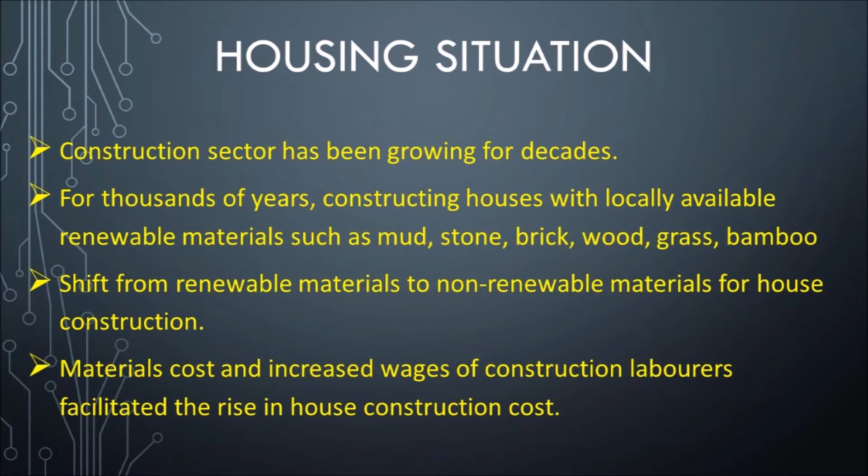Causes behind increasing house construction cost. According to the Confederation of Indian Industry (CII) and Indian Green Building Council (IGBC) estimation, every year in our country construction takes place in around 16.2 billion square feet area for housing. According to the survey, around 70% of construction cost goes to construction material cost alone. These materials include cement, iron and steel, bricks, sand, gravel, stone, murram, welding material, tiles, plumber material, electricity material, wood, etc. Particularly cement, iron and steel, and sand prices have skyrocketed. Along with this, wages of workers involved in construction like construction workers, welders, carpenters, plumbers, painters, designers, tile setting persons and electricians have increased considerably.

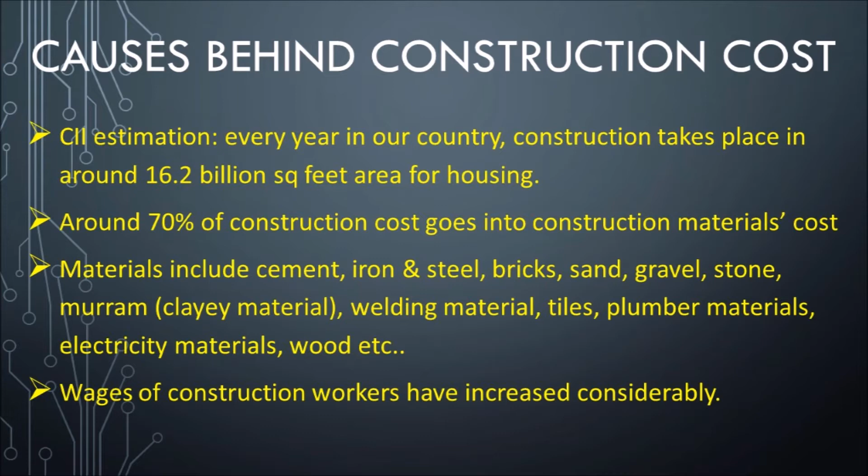House construction cost. Based on the current scenario, constructing a medium level house of 1800 square feet to 200 gajalu in a second tier city according to 2018 prices may cost between 18 lakhs to 20 lakhs excluding land price. The details are given below.

Cement 800 bags: 2 lakhs 50,000. Iron and steel: 3 lakhs. Bricks: 1,68,000. Wood: 1 lakh. Sand: 1,50,000. Gravel: 90,000. Stone: 50,000. Murram: 4,000. Welding material: 70,000. Tiles: 60,000. Plumber material: 1,50,000. Electrical material: 1 lakh. Total material cost: 14 lakhs 92,000. Construction workers' wages: 2 lakhs 50,000. Carpenter, electrician, welder, plumber charges: 1 lakh 15,000. Total: 18 lakhs 57,000.

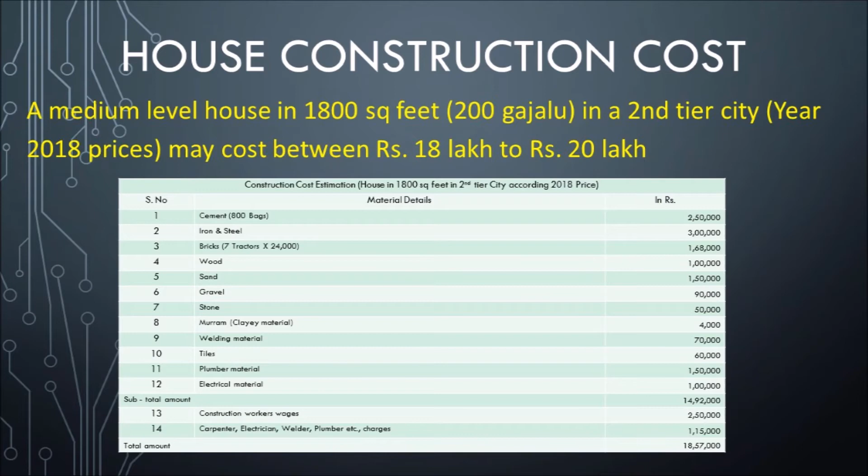What is a low cost house? The increasing cost of house construction, scarcity of raw material, unavailability of skilled persons, busy life, etc. are gradually pushing people towards low cost and environmentally friendly houses. Constructing a low cost house means constructing a house with locally sourced material along with improved skills, innovative methods and technology without compromising on the strength, performance, durability of the structure. It also includes locally available skilled persons, energy saving and environmentally friendly designs.

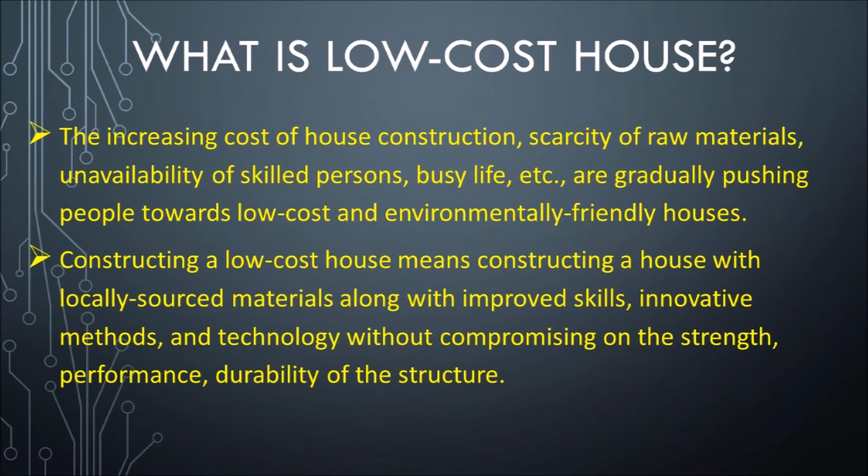Critical things in low cost house: reduction or avoidance of non-renewable and high cost materials such as cement, iron, steel, sand, etc. Reduction of person work days, technical person work days and construction time. Utilization of renewable and local materials such as mud, stone, wood, bamboo. Usage of prefabricated panels in foundation and roof, which drastically reduces construction time. Usage of locally available tiles and broken bricks for bedding.

Reduction of house management cost by designing construction to ensure natural light, airflow, etc. Usage of solar panels and water harvesting structures. Avoiding plastering works on the walls. Reducing wood by replacing with iron frames or frameless windows.

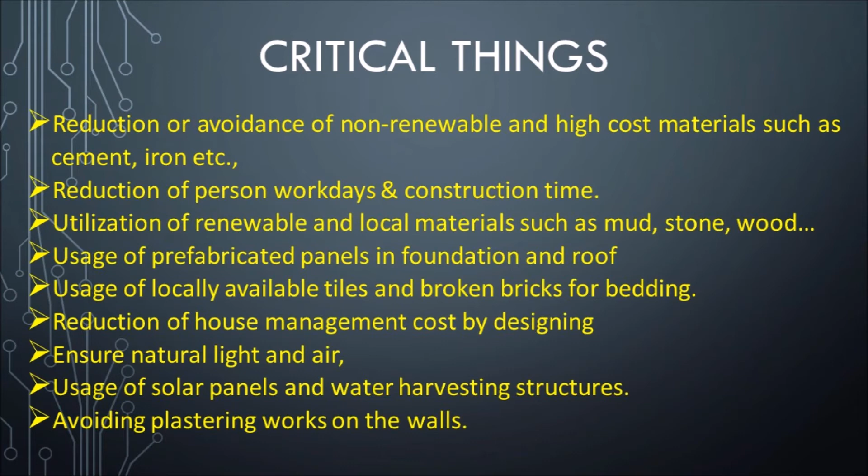Low cost houses across the country. Low cost house construction is basically based on locally available renewable materials. This is an important feature in the low cost house. This facilitates various models across the country depending on the geographical condition, environment and available raw material. There are a lot of variations in house construction in rural, urban and tribal areas. Within these areas as well we can see variation in construction. For example, in some places where bamboo, stone or mud is abundantly available, people are constructing houses with bamboo, stone and mud.

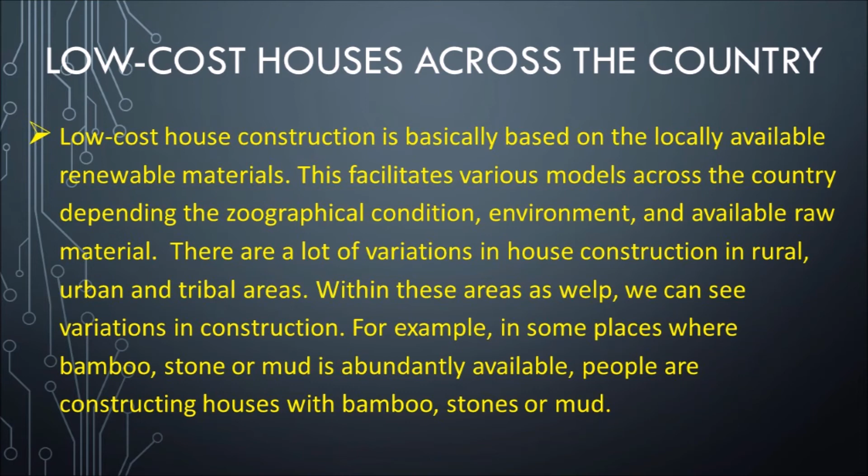Government initiatives. Low cost house construction is the need of the hour in the present context of the world, particularly in our country. According to the Indian Institute of Management Bangalore (IIMB), there is a shortage of 18 million houses as per 2015 in the country. About 99% of this shortage of houses was among poor people. Homelessness is not only a problem of lack of physical house, but it is also a problem of loss of family, community, and sense of belonging to the poor people. Providing house to all is one of the goals of the Sustainable Development Goals (SDGs).

Government of India recognized this housing problem and started providing houses to low income groups. In 2014, government launched a housing for all mission known as Pradhan Mantri Awas Yojana Urban with the aim of providing houses to the population by 2022. This mission was mainly designed on the foundation of low cost houses with advanced technology and environmental friendly design. Over the years, government has designed and implemented various policies to provide houses to the poor: Valmiki Ambedkar Awas Yojana, Jawaharlal Nehru National Urban Renewal Mission, Rajiv Awas Yojana, Pradhan Mantri Awas Yojana Urban.

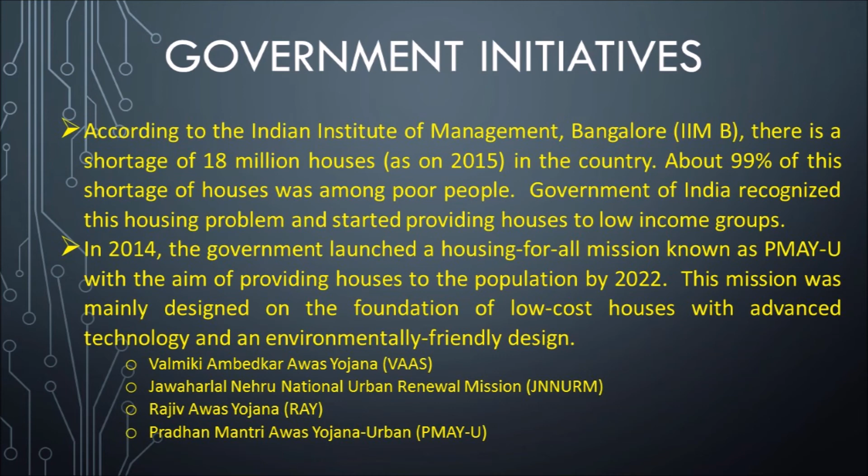Benefits of low cost house. Low cost houses are not only economically beneficial due to the reduction in house construction cost with lesser material cost and labor cost, there are various other benefits as well. Reduce house management cost. Can use locally available material. Provides employment to local technical persons. Most of the material used in the house can be reusable. Reduce house construction time. Provides sufficient light and ventilation. Can use modern technology in the construction. Environment friendly and promotes living closer to nature.

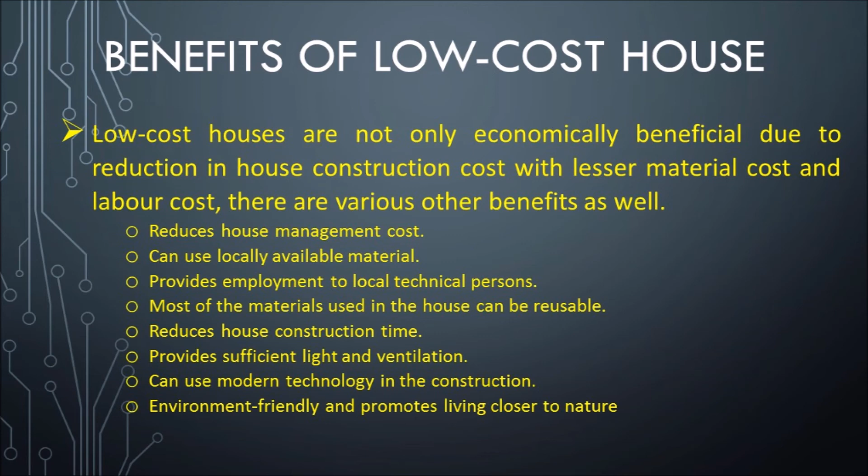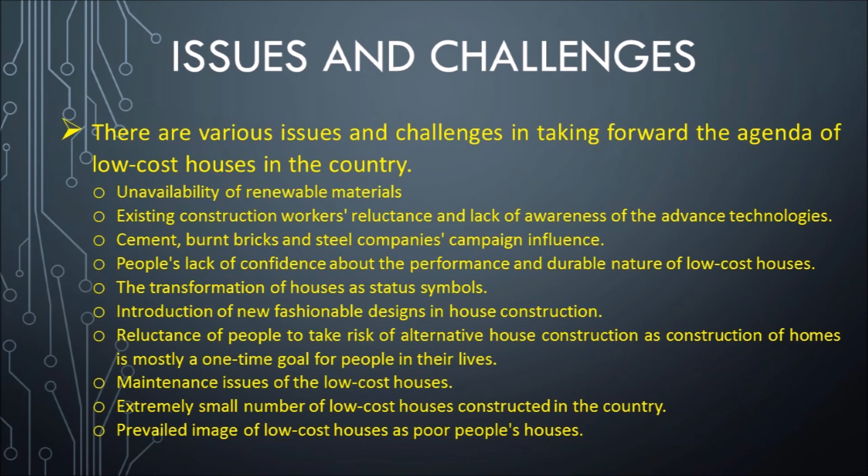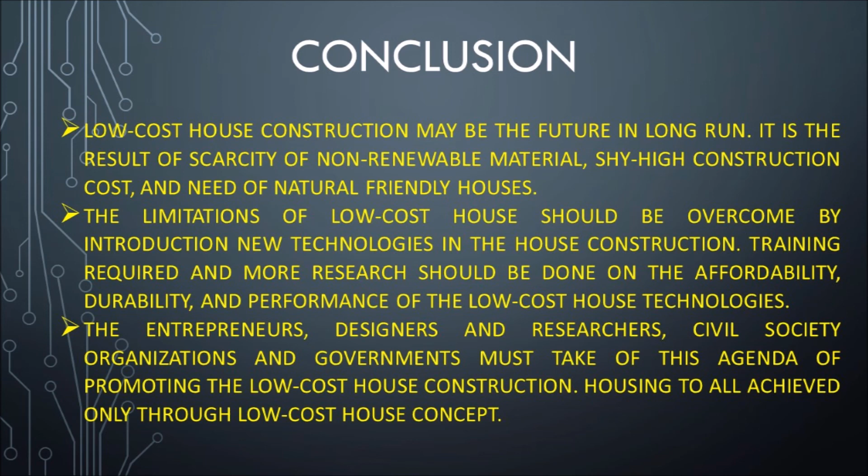can be achieved only through the low-cost house concept. Thank you.